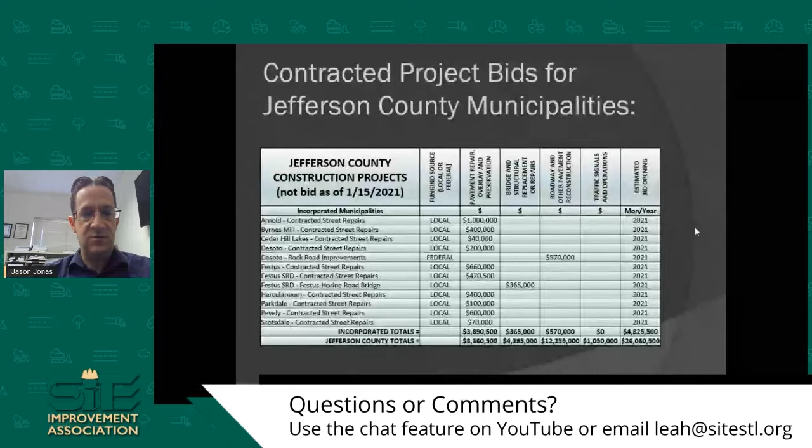So Jefferson County has a lot of bid opportunities this year - a whole lot of bridge projects, road projects, pavement preservation, and reconstruction projects. I'll go through some of the larger ones in a few minutes, but largely Jefferson County has about $20 million in projects to bid out this year. In addition, our cities have about another $5 million, and most of the cities just have contracted street repairs, both asphalt and concrete, not delineated between them. That's largely what they have going on this year, with not many federal participating projects.

If you need further details about those bid opportunities, reach out to the cities themselves. City of Arnold has Judy Wagner, who many of us are familiar with, and she's got the lion's share of improvements among the cities in Jefferson County. All total, Jefferson County has about $26 million worth of contracted bid opportunities that we foresee in the next 12 to 15 months.

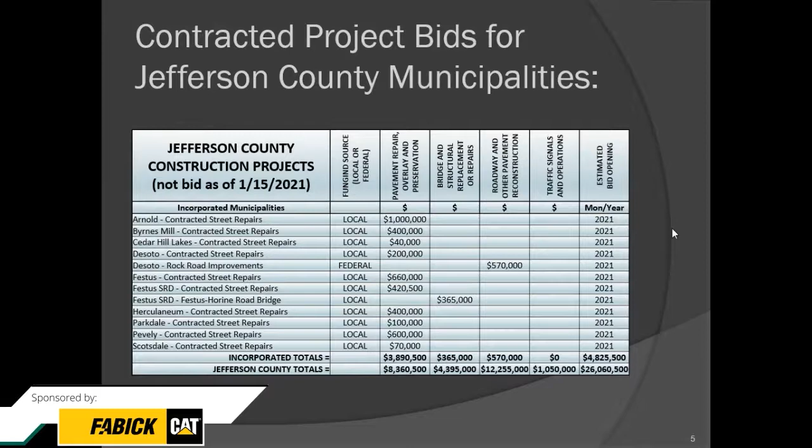The first one is Old Lemay Ferry Road. This is a project we had intended to bid out last fall, but it got pushed back due to condemnation issues - no real issues with COVID itself, but condemnation held us back a little. It's two-thirds of a mile of reconstruction and realignment with two intersections. All 3 are county roads - Spring Forest and East Rock Creek tie into Old Lemay Ferry and will all be realigned. Old Lemay Ferry will go from two 11-foot lanes to two 12-foot lanes with a center left turn lane in both directions, plus 3 to 6 foot shoulders with 3-foot curb and gutter throughout. There's also a major box culvert being reconstructed and replaced - about a 12-foot wide single cell box culvert. This project is estimated at roughly $4.3 million, and we anticipate it being bid out in late spring, probably May, hopefully, or more likely June.

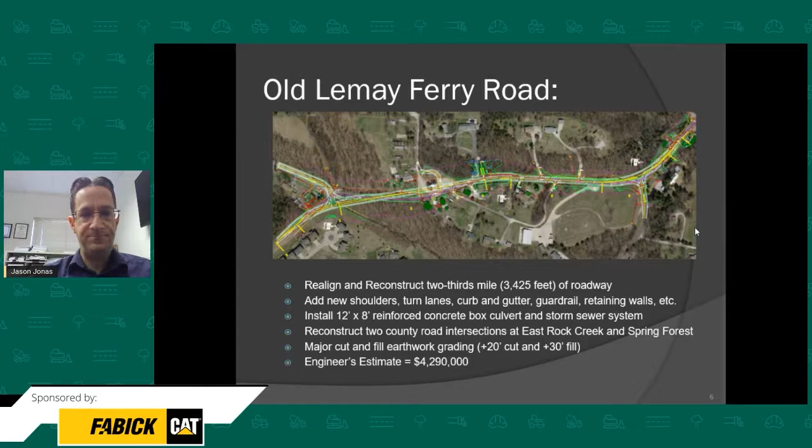Seckman Road was also intended to be bid out late last summer or early last fall. It also faced condemnation issues that have since been resolved. We have authority to advertise, and this one should be on the streets in the next week, so look for that real soon. This is the same project talked about last year - Seckman K-12 campus, a major arm of the Fox C6 school district, runs through this corridor along with many subdivisions, strip malls, and gas stations. We'll be overlaying the road, but the main improvements are a roundabout at the Old Lemay Ferry, Seckman, and Lions Den intersection, plus 6-foot sidewalks throughout the third-of-a-mile corridor, and 2 traffic signals at the entrances to the K-12 campus. This is estimated at roughly $2.15 million.

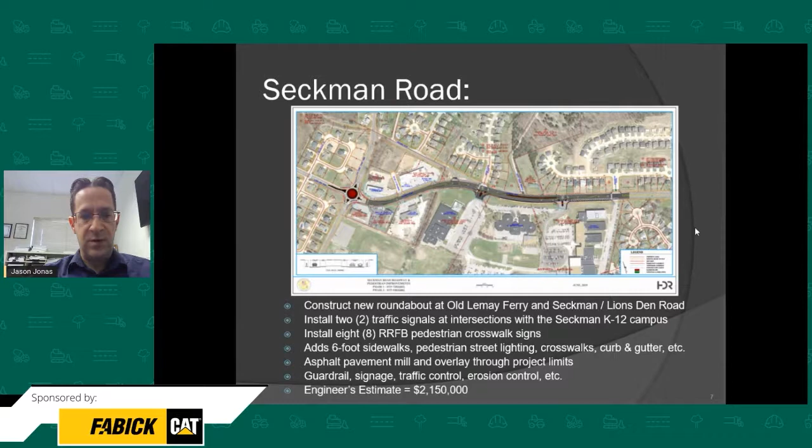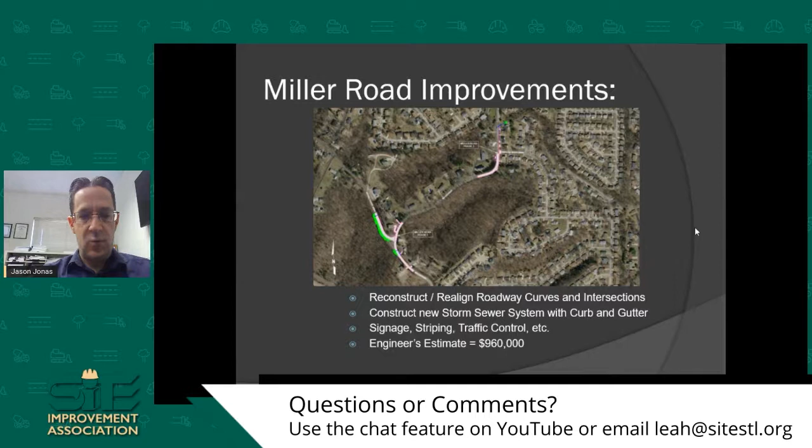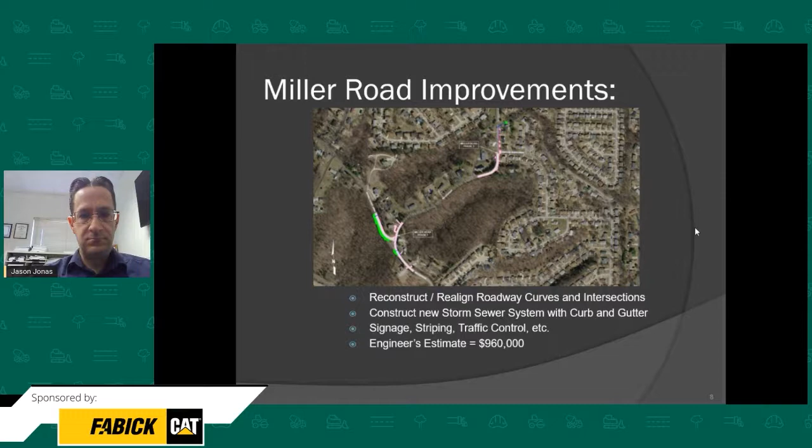Next is Miller Road improvements, at the Spring Forest intersection - the other terminus where Spring Forest ends into Miller, the other being on Old Lemay Ferry as discussed earlier. It's a Y intersection that we want to tee into for proper sight distance. There are several improvements along Miller at that intersection vertically needed for sight distance, as well as a sharp curve approaching Country Court subdivision at the north end that needs to be realigned. Widening will include 1-foot shoulders and 12-foot lanes as opposed to the current 11-foot lanes. This project is estimated at a combined roughly $1 million, and should also be bid out in May or June.

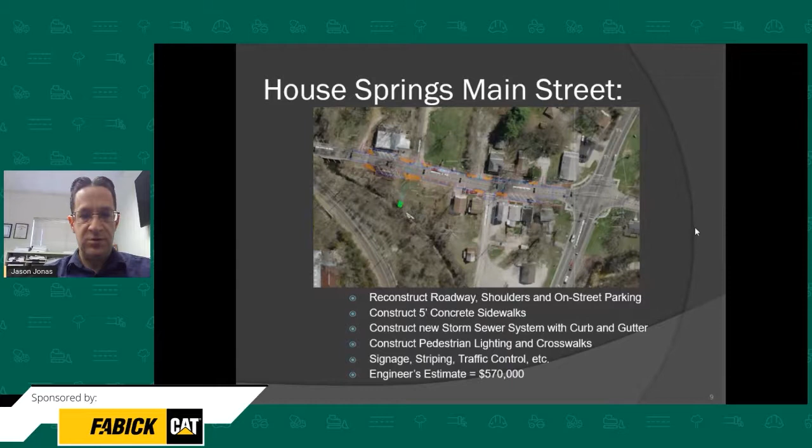House Springs Main Street - this project will reconstruct two 12-foot lanes with roughly two 6-foot shoulders that will be improved. Parking will be improved, adding on-street parking, reconstructing the pavement, minor street lighting with 7 or 8 street lights, a closed drainage system, and minor improvements to the intersection with MoDOT's Route MM. This is slated to be bid out in late spring, probably the May-June timeline, estimated at $570,000.

Rugeley Keep, we've got a couple of bridges to bid out this year. Rugeley Keep Bridge is in with MoDOT right now for final PS&E approval and obligations, so we're looking for that to be bid out here in the next month or two. Standard single span bridge with I girders, minor reconstruction and realignment of the shoulders.

$555,000 for that bridge. Sandy Valley Road Bridge is set to be bid out this week, so look for that real soon. Again, single span structure with I girders, even smaller amount of relocated, reconstructed roadway to get this one in as a replacement, and $455,000 for this one.

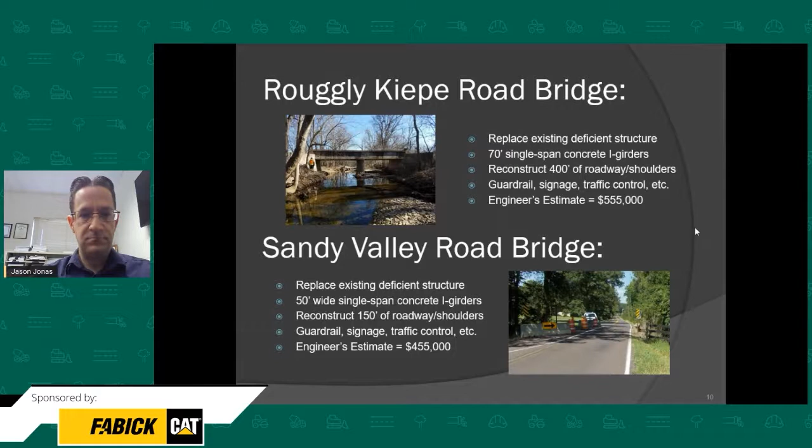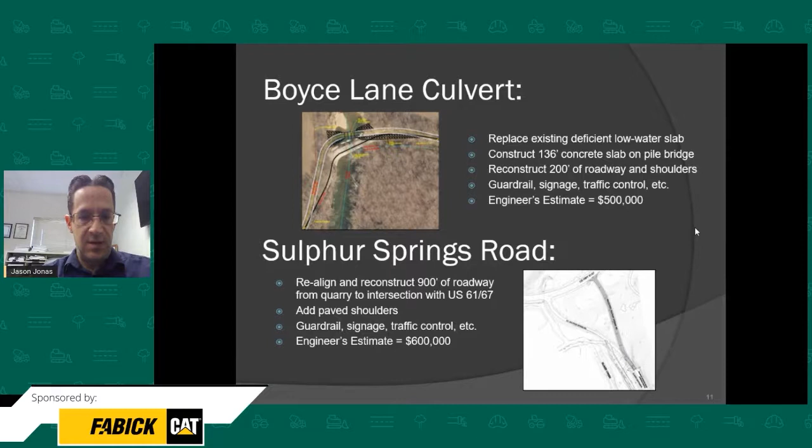Sulphur Springs Road. This is a partnership with Simpson Quarry, Simpson Materials. We're looking to realign Sulphur Springs Road as it connects with US 61/67 to get it out of the 100-year floodplain, as it's been affected by Glaze Creek in the past. This way the quarry won't flood, and all the residents in a small historic community along the riverfront won't either. They'll have flood-proof access to 61/67. This one is slated to be bid out and constructed starting in the fall, and we estimated it at $600,000.

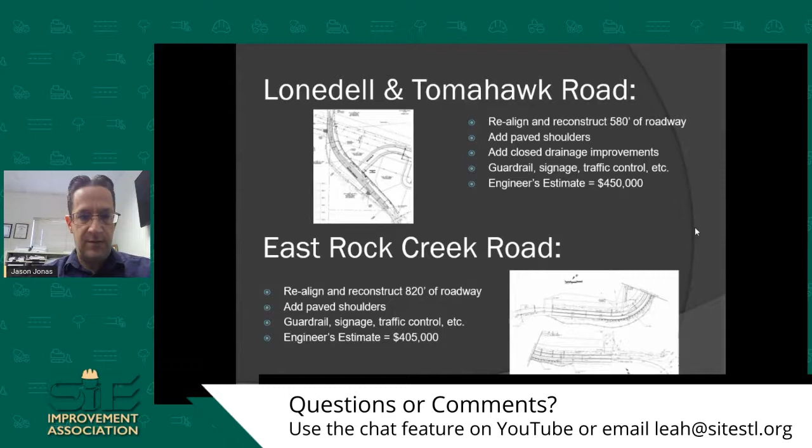East Rock Creek Road. This is a realignment of about 800 feet of East Rock Creek to fix the curve, a high frequency crash curve that we have along East Rock Creek. We're adding shoulders and other normal features, as well as a lot of guardrail on that one, estimated at $405,000.

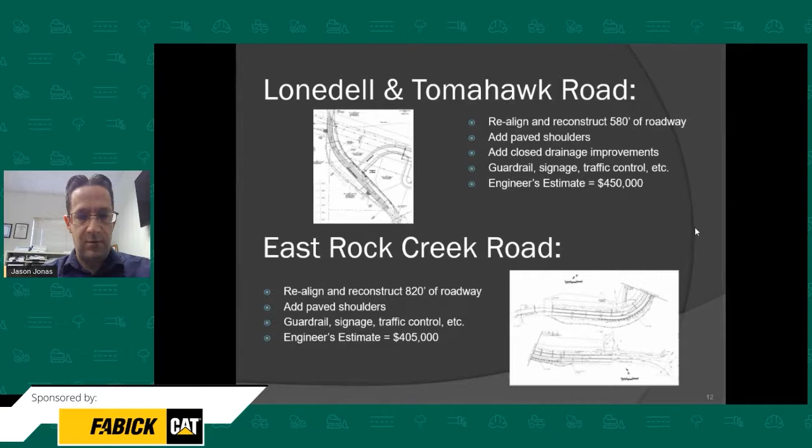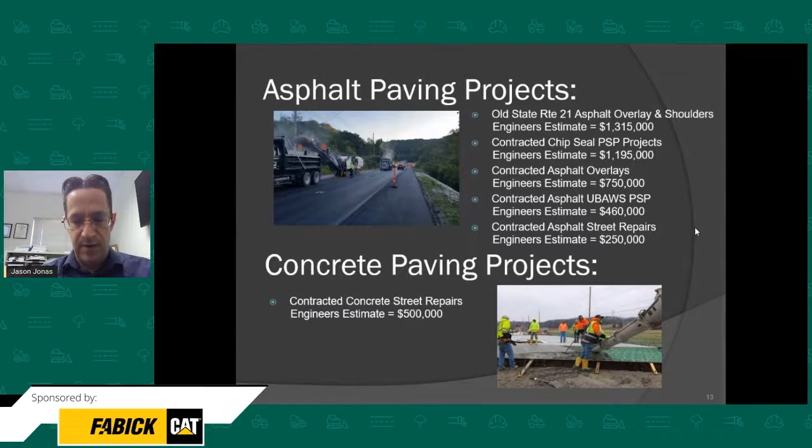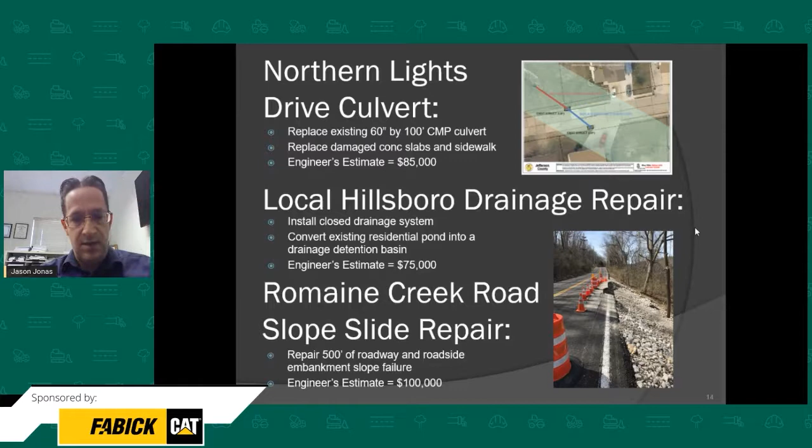Romaine Creek Road, we've got a slide repair. As you can see in the picture to the right, it's been in slide condition for the last 6-8 months, and we're looking to bid that one out here in the next few weeks. That's estimated at about $100,000.

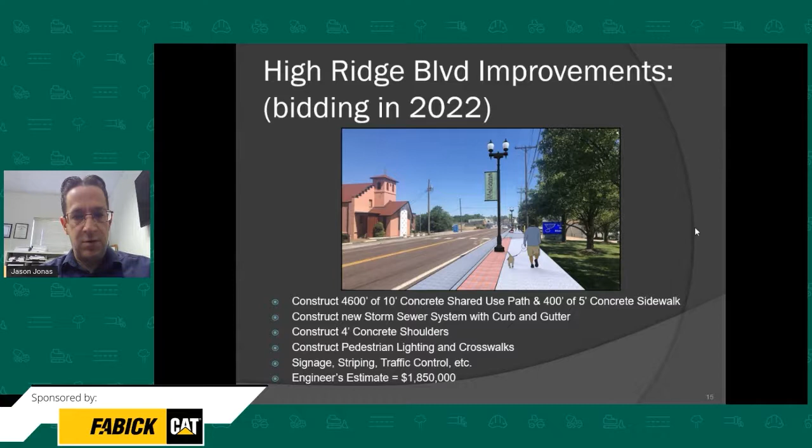We have a bridge combo project that we'll have bid out next year in 2022. Armbrust, Doss Hollow, and Harness are 3 rural bridges that have been packaged by MoDOT into one project, estimated at about $1.6 million.

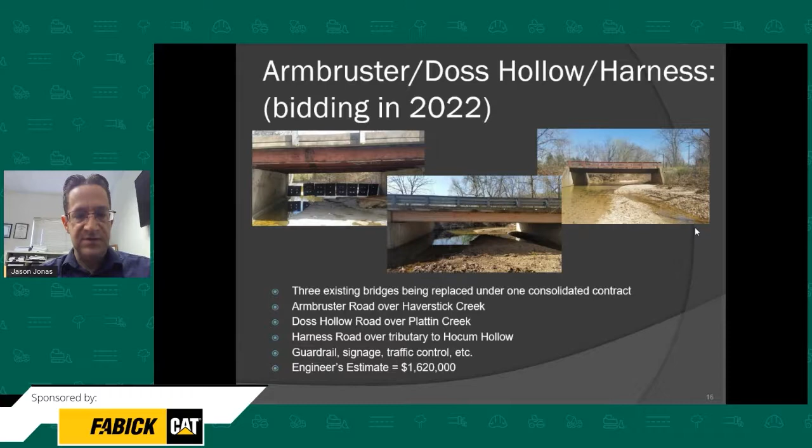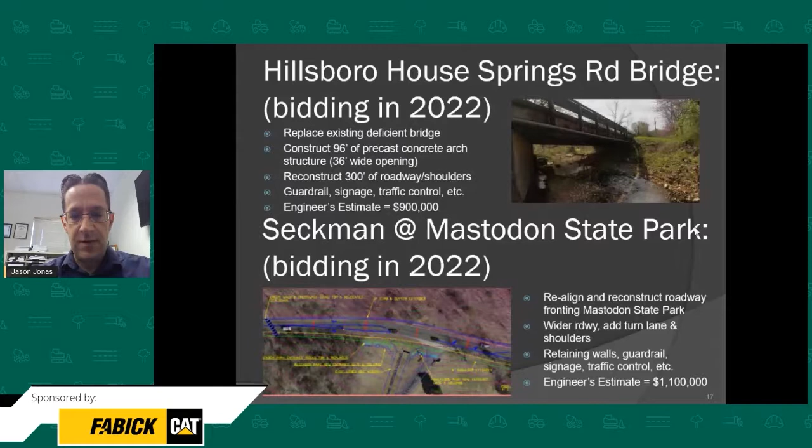And that's what I have. If you have any questions, you can reach out to me or our technical division manager who runs all of our project efforts, Chris Elan.